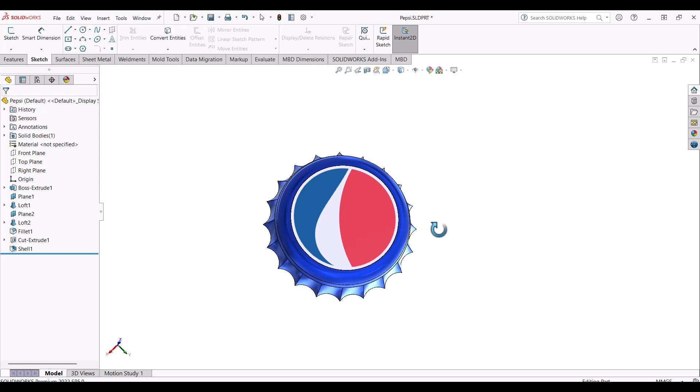Hello everyone, so in today's video we'll be looking at how to design a Pepsi bottle cap. This could be any other brand, I just like the blue color, that's the reason why I've chosen the Pepsi bottle cap.

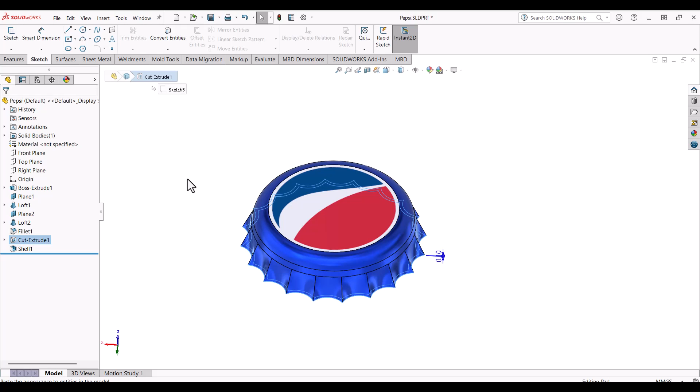To create this part, you will have to go through these steps. We started off our design by creating the base of the cap, then created a plane, then Loft Boss, another plane, another Loft Boss, then a fillet, then an extruded cut for the base, and then a shell. These were our steps, and now let's go ahead and design it.

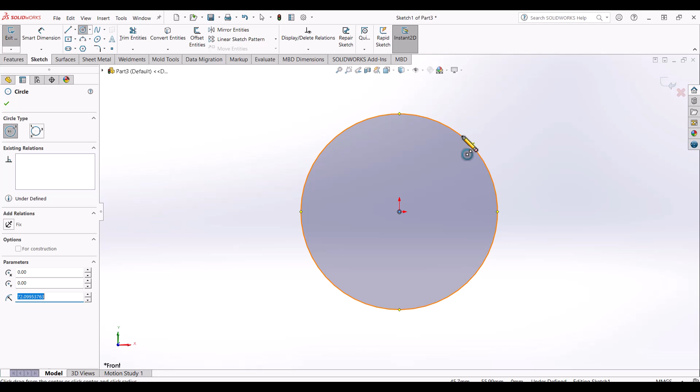To create it, go to New, click on Part, then click OK. Once you're there, go to Front Plane and create a sketch. Let's start off with the diameter of 30, and then let's add in an arc, 3 point arc. Let's make these 2 points horizontal, and let's add in dimensions. It should be radius 3, and this distance should be 4.71.

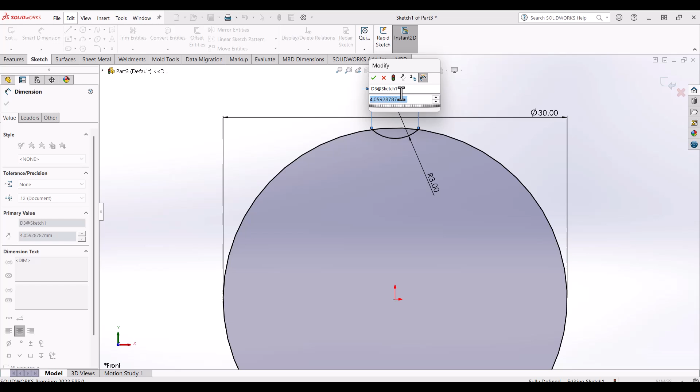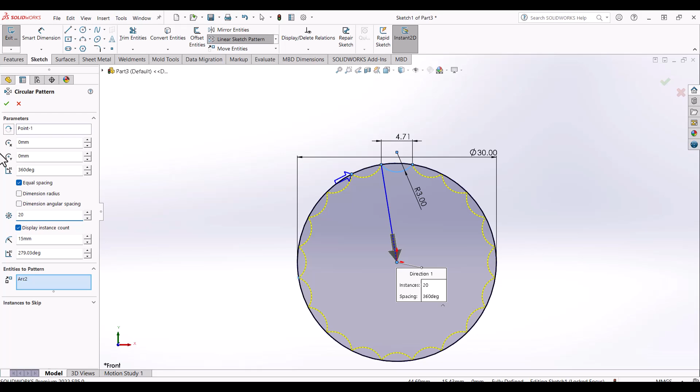Now let's go ahead and create a pattern. Select the midpoint of the circle and go to the arc. The repetition should be 20. Alright, then click OK. Let's fully define our sketch. Calculate, and you're good to go.

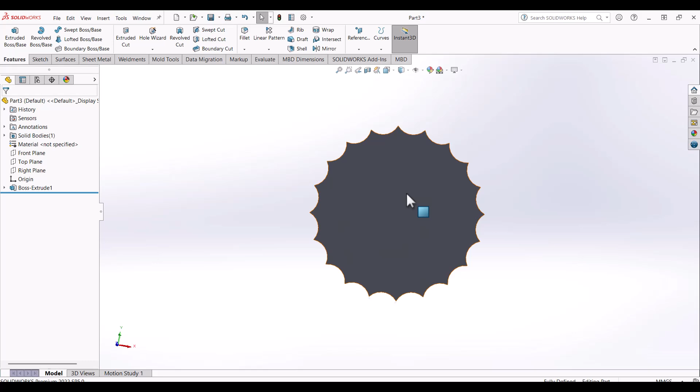Now let's go to Feature, Extrude Boss, select the middle area, and make it 0.1 because we would delete it later on anyways. Once you're there, let's go ahead and create a plane. It should be offset by 4 millimeters. Once you have done that, select the plane and create a sketch.

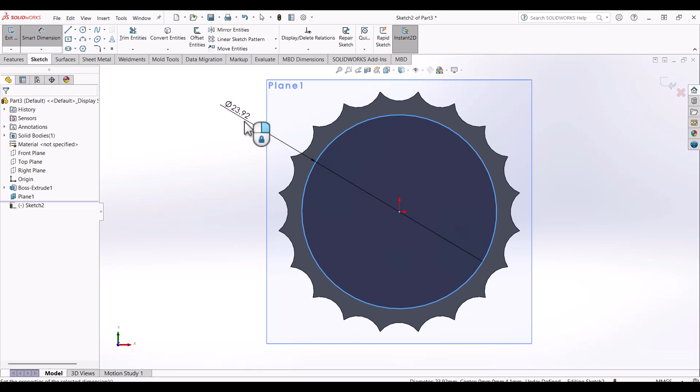The second diameter should be 26.5, and exit sketch, and let's go ahead to our initial extruded boss. Let's go to sketch again, convert to entities, and you're good to go.

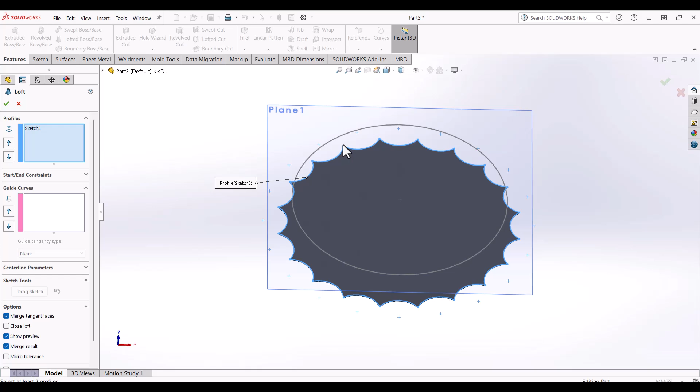Now let's go ahead and create a Loft Boss. Select the initial sketch and the second one. So here you got the base.

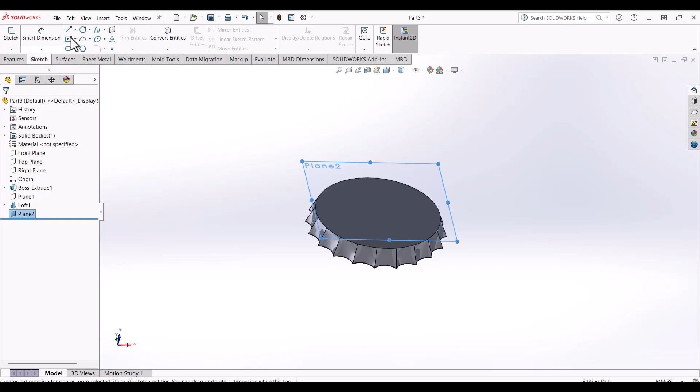Now let's hide this plane and create another one. This second one should be offset by 3 millimeters, like that. Now let's create another sketch. The second sketch should be 25, like that. Let's exit sketch and create a Loft Boss again. Select the base, select the sketch, and you're good to go.

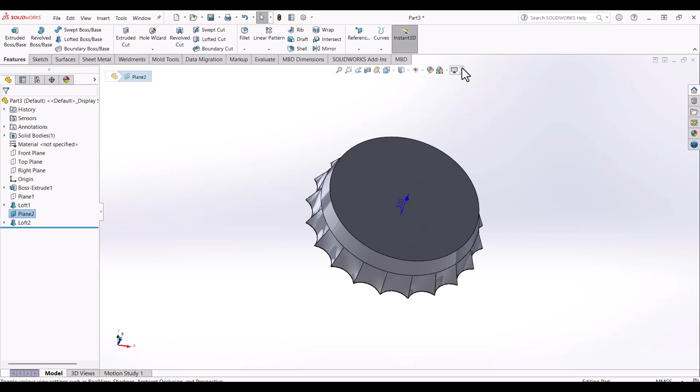Now let's hide the plane again, all of them. Anyways, we don't need them. I just needed to change my background, I like it white for better view. Now let's go to fillet, select this face, make it 2.5, then click OK. So here you got something that looks like a cap.

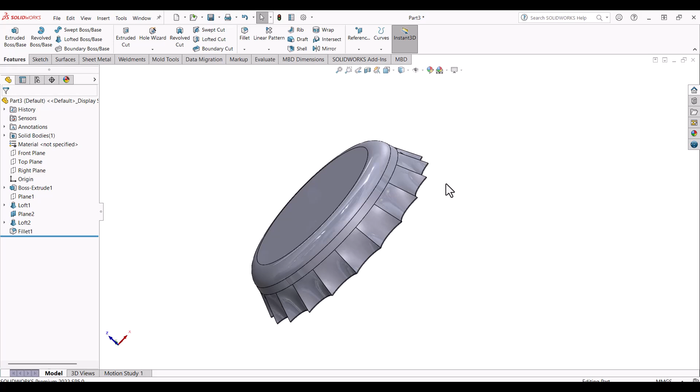We just need to refine it a little bit. Let's go ahead and remove the first extruding boss that we have created. Just click on extruded cuts, convert to entities, and then make it 0.1. You're good to go. Now let's go to shell.

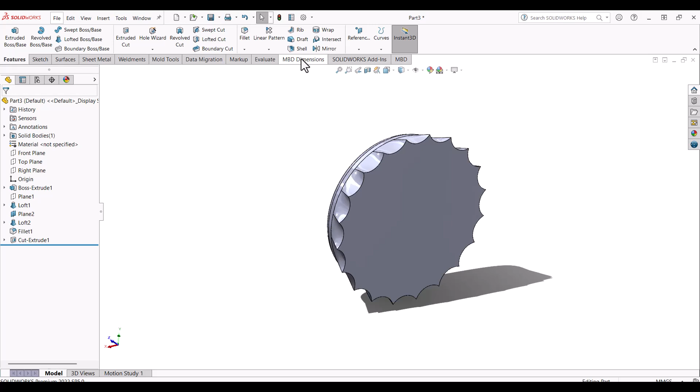Make it 0.5, and there you go. Here you got something that looks like a bottle cap.

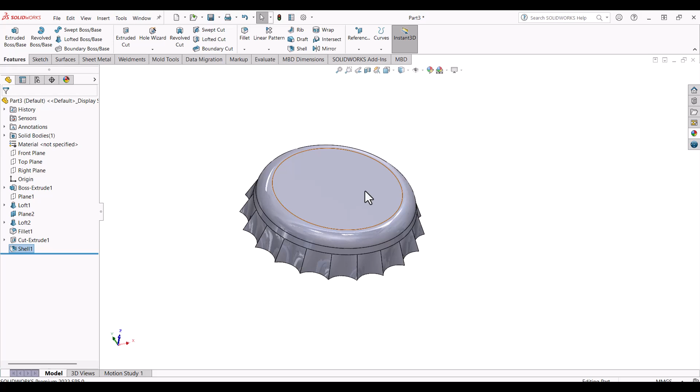Now let's just add in appearance to make it look more like a bottle cap. I mean, you can create anything, Coca-Cola, Pepsi, any brand you want, as I said in the beginning, just like blue. So apply the sprayed blue color, painted one, and now let's go to decals. Let's open the library and apply anything. Go to logos, and we'll bring our logo anyway.

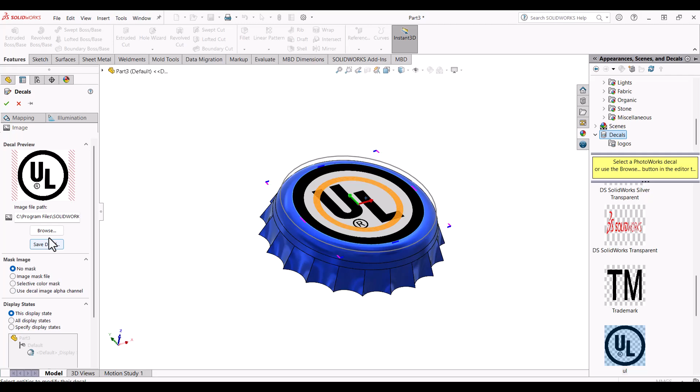So let's browse the logo, if you have the logo. If not, this one I've just downloaded from Google anyways. It does not belong to me.

So for adjustment, let's just go to mapping. If your logo is offset, just go ahead and fix the width, the height, and it will do it by itself. Here you can just adjust the way that it looks if you want to, if you don't like the coloring or whatever.

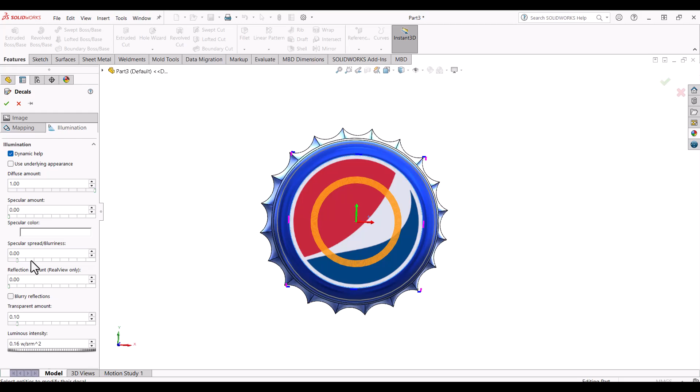So here you got something that looks like a Pepsi bottle cap. Hope you like this tutorial. See you on the next one.